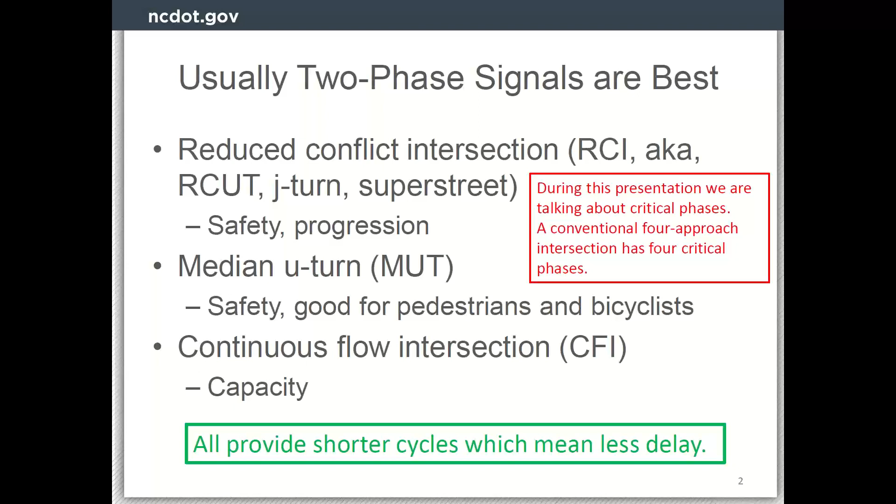Based on previous studies, we know that 2-phase intersection signals perform very well. For example, reduced conflict intersections (RCIs), also known as RCUTs, J-turns, and superstreets, are performing very well. We got very satisfying performance. In North Carolina, we have more than 100 of them, and both in terms of safety and traffic operation, specifically in terms of progression, we got very satisfying results. Also, median U-turns, which are very popular in Michigan, are another example, and continuous flow intersections (CFIs) offer the highest capacity among all intersection designs.

Of course, sometimes it's going to be a big challenge for us to use this kind of two-phase intersection. What's the reason for that? Because it's going to be a big change, and sometimes neighbors, business owners, politicians, and media are not satisfied with that. Removing 2 out of 4 phases, that's a big change. Especially in cases when we are dealing with high demand on minor streets, that's going to be a bigger challenge—there's going to be significant cost and significant impacts that maybe are not going to be the best options for us.

So in this situation, please go to the next slide.

So in this situation, maybe we can provide a better situation by considering three-phase design. Instead of removing 2 of these phases, we can remove just 1 of them, and get results similar to two-phase results, some benefits we can expect from two-phase intersection design, but just by removing 1 of them.

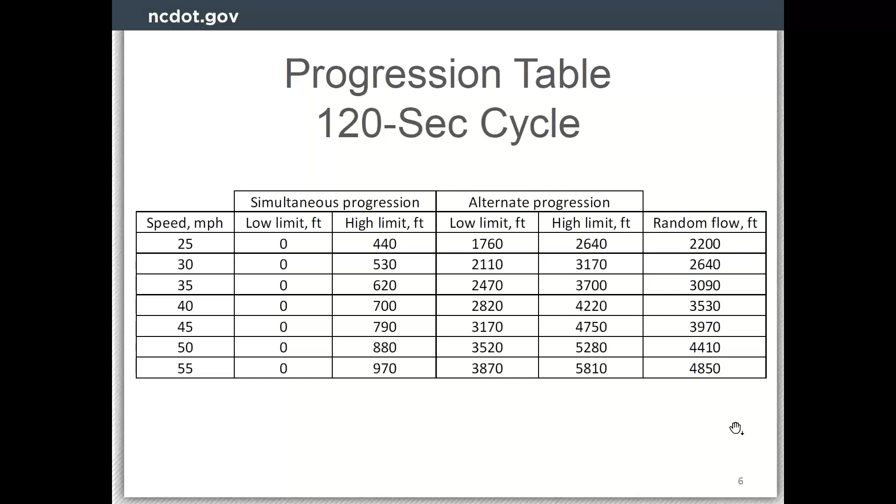In this presentation, we're going to run through quickly some of the three-phase designs that are out there for four-approach intersections, with some pluses and minuses of each design. Always with my work and Amir's work, what we're trying to do is inspire you to kick the tires a little bit. Next time a file lands on your desk and you get a chance to try some intersection alternatives, maybe you'll think of these as well. Give them a try—maybe they'll work out. If you end up going back to a conventional four-phase, fantastic, but at least give a try to some of these. A few notes before we get into the designs themselves.

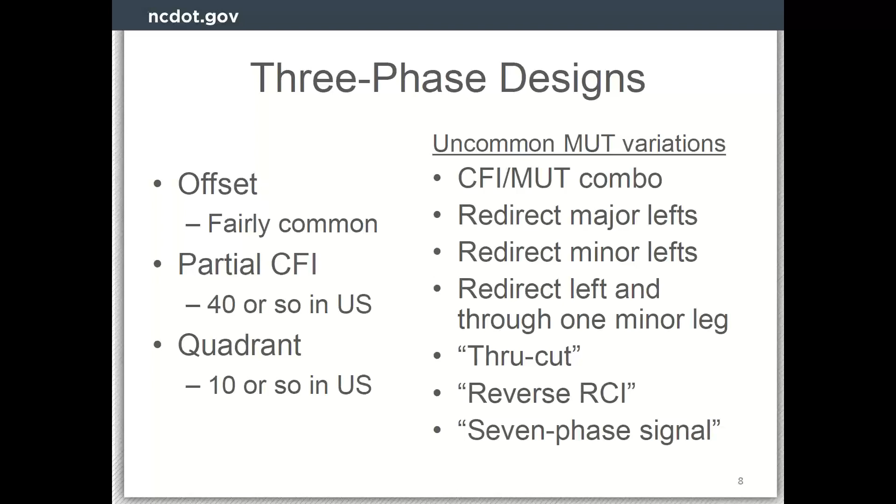Here's a list of the 10 designs we'll show you during this presentation. The 3 on the left side are fairly common across the U.S.: offset intersections, partial CFIs, and quadrant designs. The list on the right side are the uncommon ones that have maybe been built a few places or have just been published but not built yet. We did not include the New Jersey jug handle in our list. In North Carolina, anyway, we do not consider this a competitive design—it takes up more right-of-way than a partial CFI and only delivers a fraction of the capacity and lane savings.

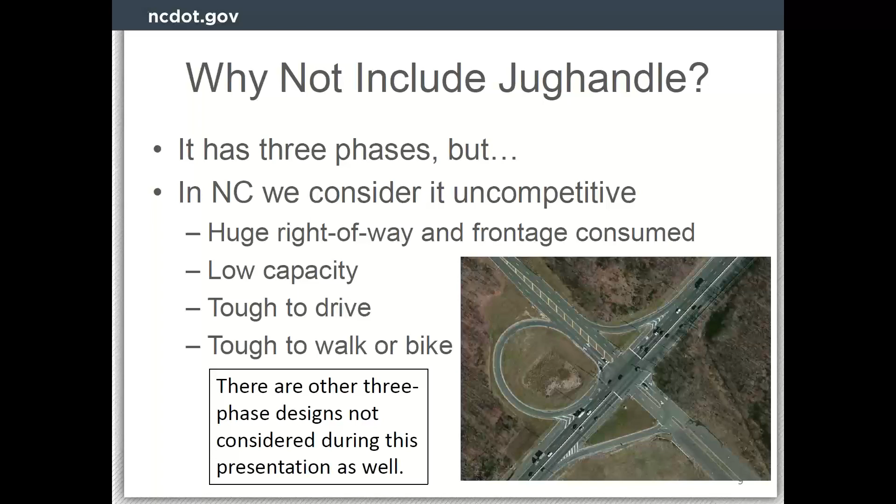So if you're in New Jersey, sorry about that, but that's where we drew the line.

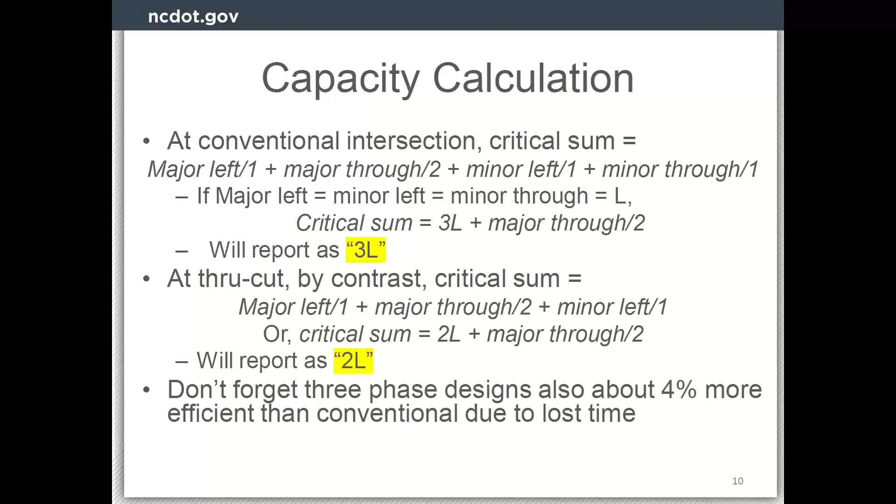Here's a note about the capacity numbers we'll show later. A bit of nomenclature: these are critical lane analyses, vehicles per hour per lane, meeting in the middle of the intersection. We assume the major street left volume equals the minor street left volume equals the minor street through volume, a variable we call L. Running out the critical lane volume at a conventional intersection gives 3L plus the major street through traffic divided by 2 lanes. The major street through term is the same in every solution, so we drop it out and just report capacity based on how many L's appear in the critical lane volume. Lower is better for capacity. That's our nomenclature.

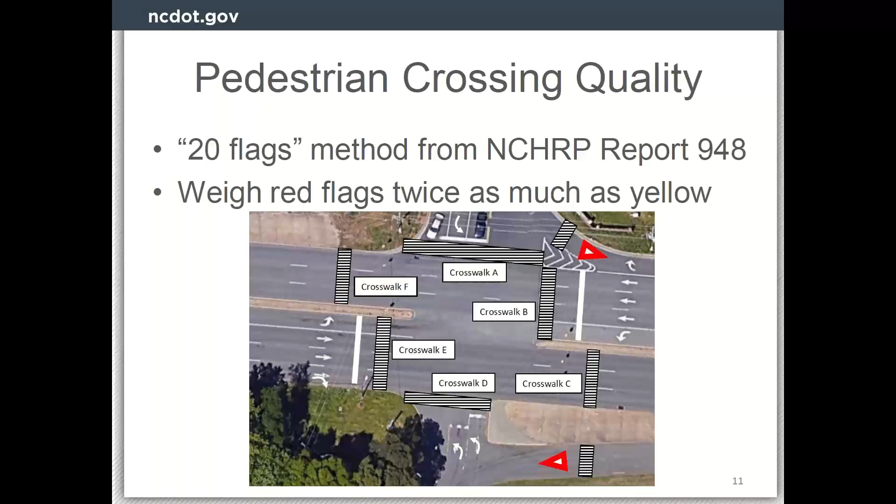One more note on our method. For pedestrian crossings, we rated each design based on the number of flags it achieved using NCHRP Report 948, the so-called flags method. Yellow flags indicate inconvenience, and a red flag indicates a safety concern. We looked at the total number of flags as a pedestrian would try to cross each of the four crosswalks at an intersection. We really like the NCHRP 948 method and recommend it to anyone interested in pedestrian and bicycle crossing quality at any intersection.

Okay, on to the results. Here's a conventional four-approach intersection, setting the table. And what you can see there is some... oops, I think I just did something.

You lost my screen, didn't you? I lost my screen anyway. Show screen. Can you see it in the back? Joe, can you see the screen? Okay, yeah. Oh great, there it is. Okay, I got it back.

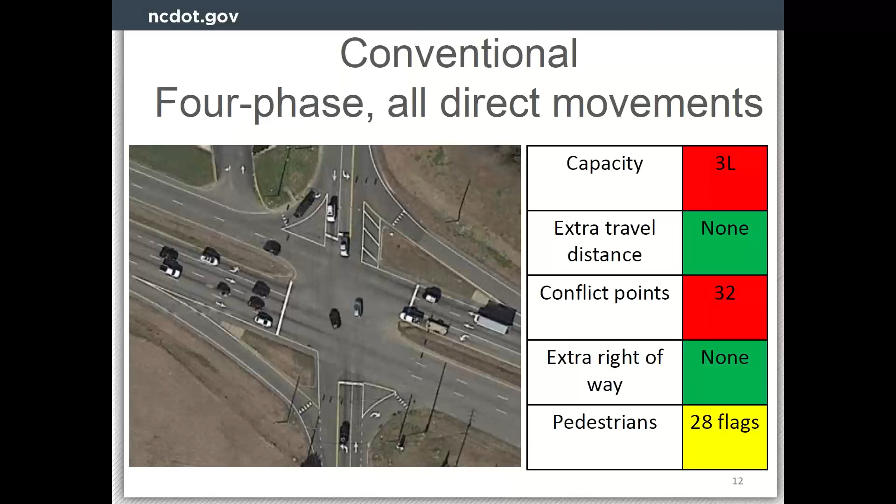So what you see here is the conventional intersection. It's a mixed bag, right? Capacity is low, colored red, but vehicles don't travel any extra distance. There's no extra right-of-way to obtain, and pedestrians are sort of blah in the middle, colored yellow there. So a mixed bag for conventional. Notably, though, capacity does not work very well.

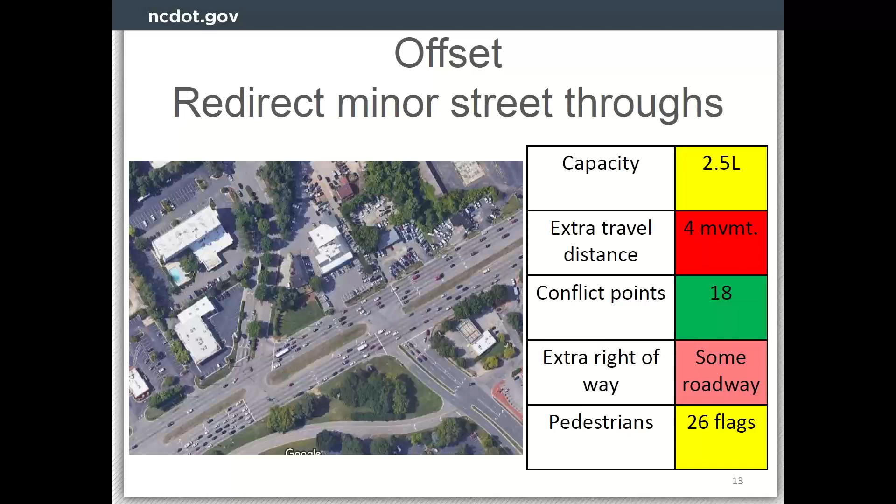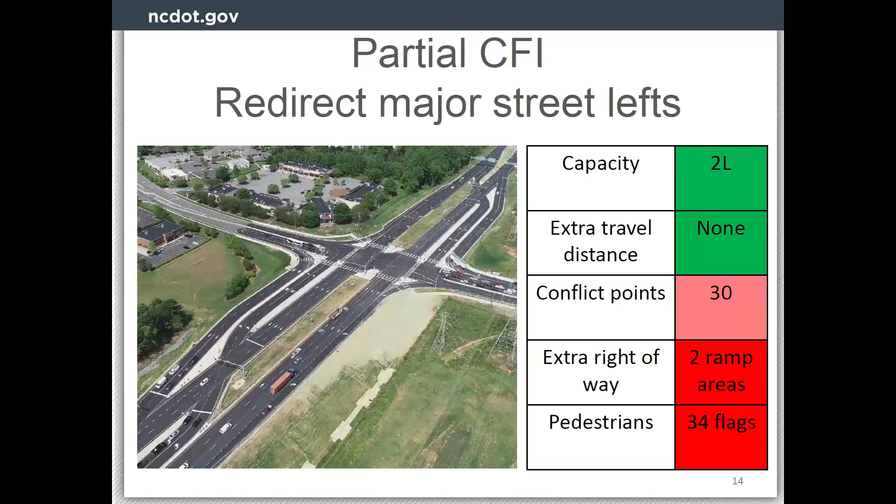Finally, among the more common three-phase designs, the quadrant roadway intersection has terrific capacity, again as low as it gets, but lots of extra travel distance, conflict points not good, and lots of extra right-of-way for that connector road. But pedestrians got good again. So this is the pattern.

This is what we're really presenting here today: these trade-offs. There is no perfect design. Some of these three-phase designs are better in some aspects than others. But here's where we hope, for your particular project with your particular concerns, you can work that trade-off and pick the best design that's out there.

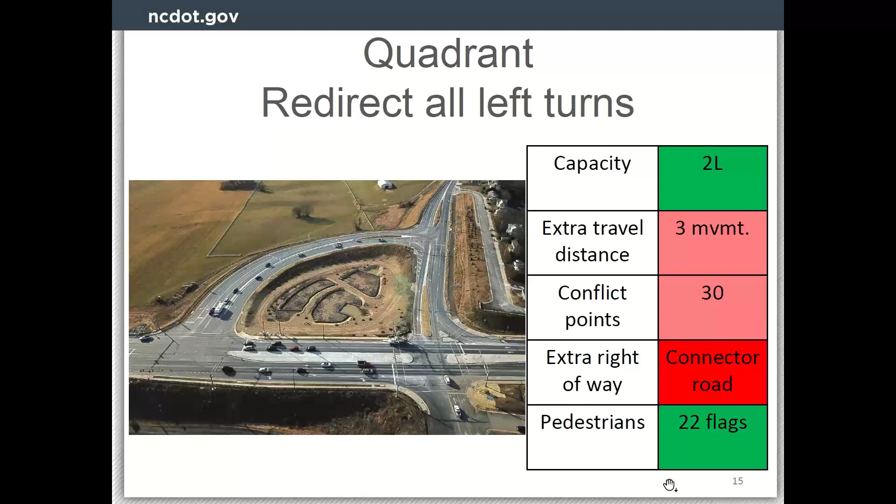Now to some of the less common ones. This is a CFI MUT, a median U-turn combination, that we're actually going to build a couple of in North Carolina in the next few years. Great capacity, travel distance pretty good, only asking one movement to travel extra distance. Conflict points and right-of-way not so good, but it treats pedestrians pretty well. So really 3 out of 5 aspects working well for the CFI median U-turn combination.

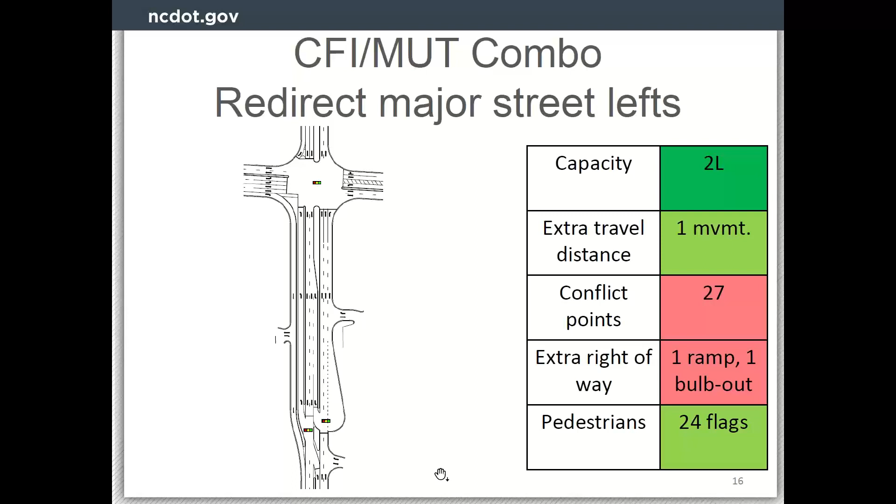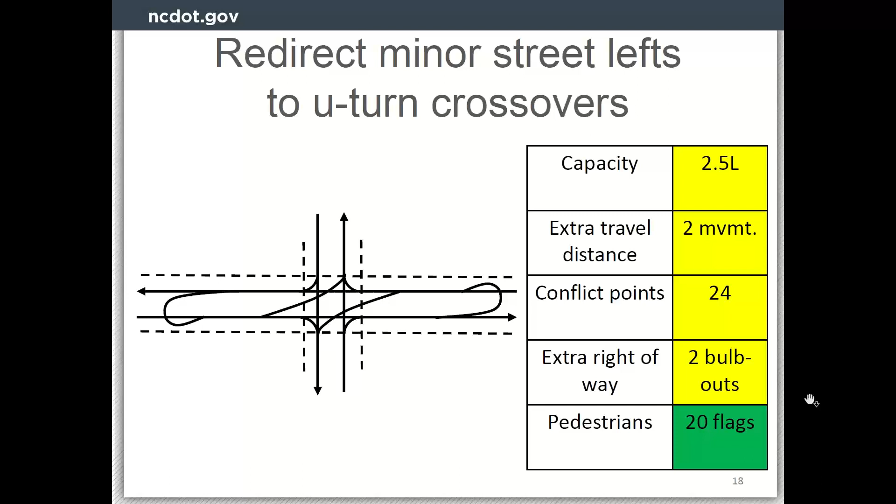Here's a design that's sort of the flip side of the partial median U-turn, redirecting the minor street lefts and leaving the major street lefts to be direct. Not so good on capacity here, middling on the other measures, but really good on pedestrians. I guess you'd say, why would you ever do that one when for the same cost, the same impact, you could have the partial median U-turn instead.

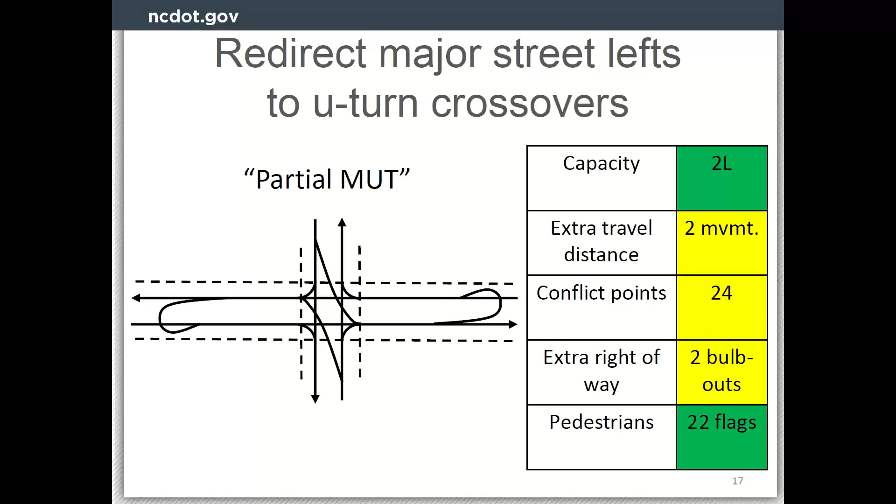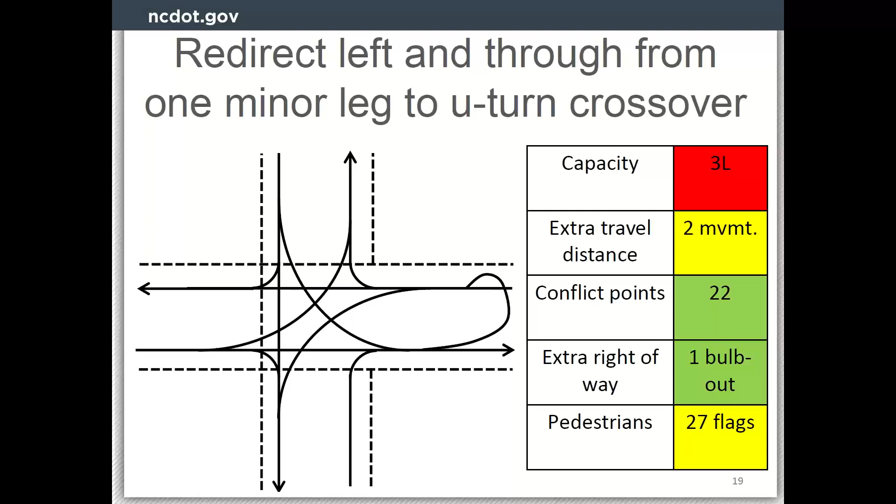Here is a design that redirects basically one of the side streets. So in this diagram, that's the northbound movement. Everybody gets to turn right, just like they're at an RCI. So low capacity, not great, but a couple of green shaded impacts, a couple of yellow ones there. So yeah, okay.

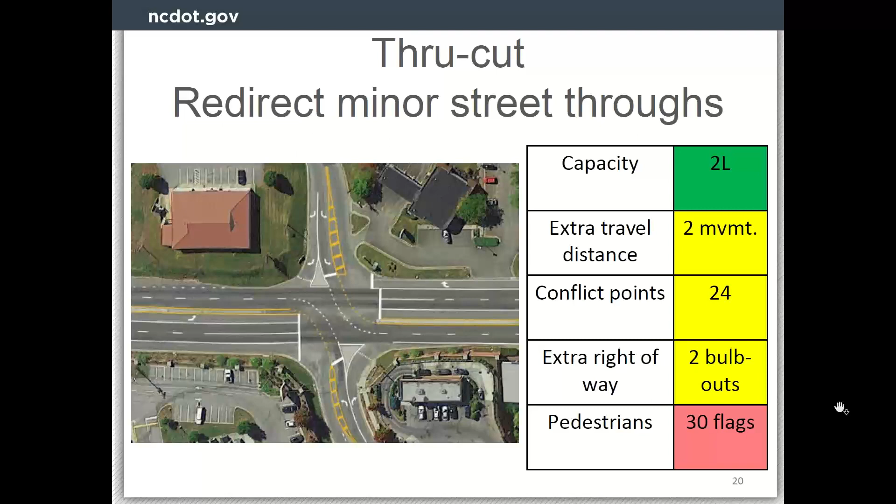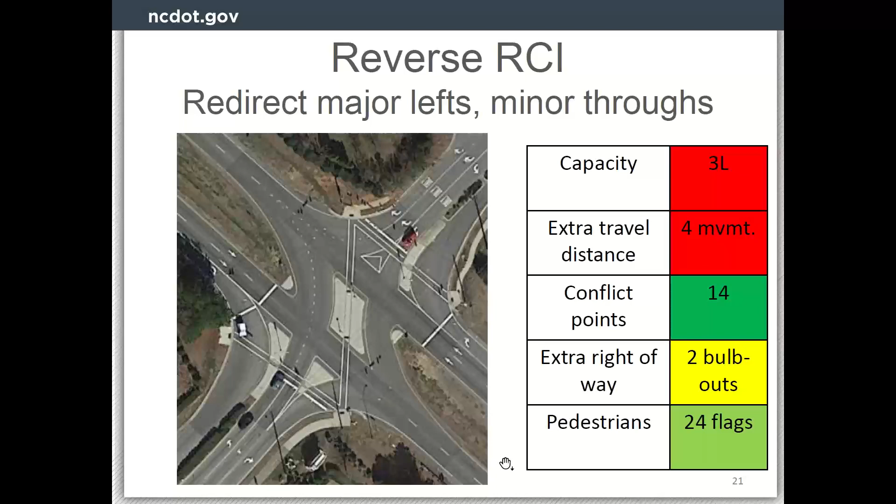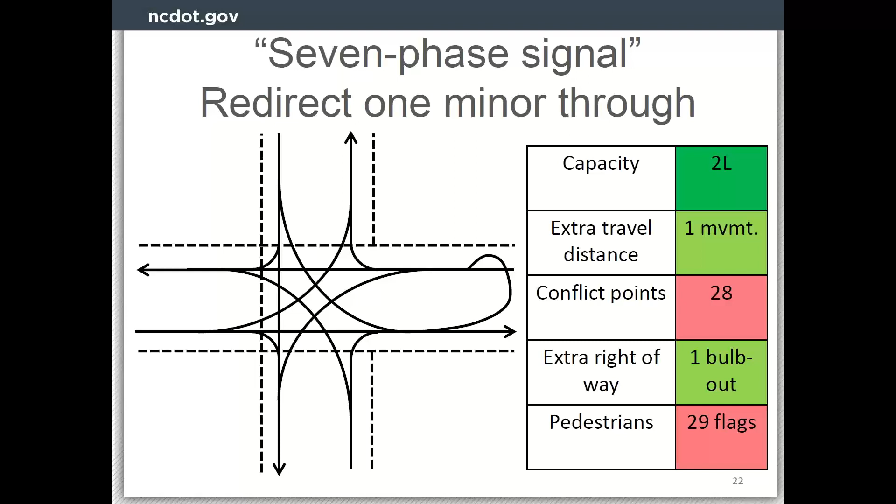7-phase signal. I think this is the last one we got to present. We published this a couple of years ago in ITE Journal in 2019. And again, you can see a mixed bag there. Travel distance and extra right-of-way scoring particularly well, but not so much on conflicts, and pretty rough on pedestrian crossing there too. So overall, what we tried to do here is to show the trade-offs between these 3-phase designs.

I guess our results were a little bit disappointing to me in the sense that I was hoping for a clear winner. I wanted one that stuck out and said that this one looks generally like it'll always work or usually work at most places, but we didn't get that. We got a lot of trade-offs. We can't have it all, but if you're in the intersection design business, you knew that already. That's the life we live. We're constantly making trade-offs. We're making compromises.

It's an imperfect world. The best intersections, as far as we could tell, are the 2-phase designs: RCIs, full CFIs, median U-turns. But if you can't do those, if you must compromise, then maybe you can work in a 3-phase design to still get that progression benefit like we talked about and get some of the better impacts like we saw down the list of the designs.

At least 10 viable alternatives, and there's probably more hiding out there. And again, what our results really showed is a trade-off between the various impacts. Mostly you get higher capacity than conventional intersections, but then after that you end up trading off right-of-way versus pedestrian, etc.

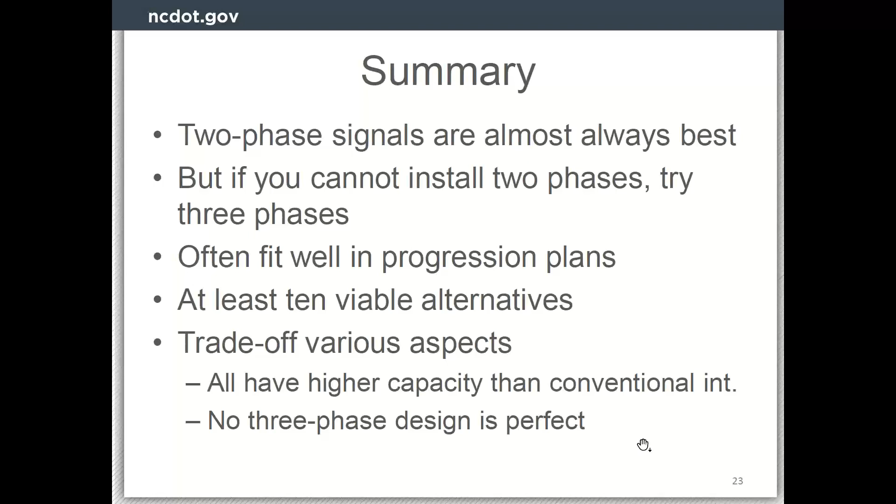I think there's no substitute here for further research. I think hopefully you agree that we've shown enough promise with these designs that we can do more, and there is promise here. So let's get some in the ground. Let's get some built. Let's test them. Let's refine them. Let's start to standardize, and let's see if they really work like we think they will, and start to fill in the gaps with some empirical data.

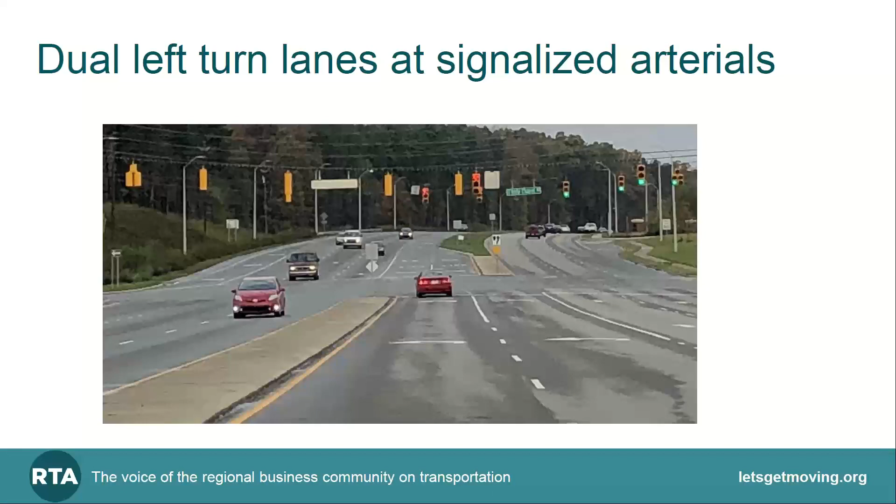Getting into more of the technical perspective, this presentation focuses on dual left turn lanes at signalized intersections. As Kristina mentioned, there's the opportunity for a permitted phase at certain locations. When we talk about permitted, there are obvious benefits, but frankly protected is the normal case, and you've seen that typical condition. There are a lot of benefits of protected left turns, so let's be clear about that.

No conflicts with opposing traffic when executing the left turn. Another benefit is providing clear direction to the motorist - the arrow provides a clear indication of what protected or exclusive use is available to them. It can also be more efficient because vehicles will platoon together as they wait for that phase to come around in the cycle. So a number of benefits - those are probably the more obvious ones.

But we're looking for a permitted phase opportunity, so we want to talk about some of the impacts of when you have protected-only left turns specifically. A lot of those are operational. One would be it requires a dedicated phase for even a single left turning vehicle.

Without any permitted phase available, you have to display the dual arrows for that, and while you're doing that, everybody else has to wait. Dr. Hummer and Amir both talked about some of the benefits of reducing the number of phases for efficiency, and this applies broadly.

As a result, delays and travel times will increase, in some cases at the margin by several minutes for some users - that's if you've just missed the arrow phase or that protected exclusive phase, you'll have to wait the whole way around the cycle again. If there were a permitted phase, you would not. Those vehicles have the largest delays; the average delays aren't as much, but there are still obviously more delays, and it's intuitive that cycle lengths go up.

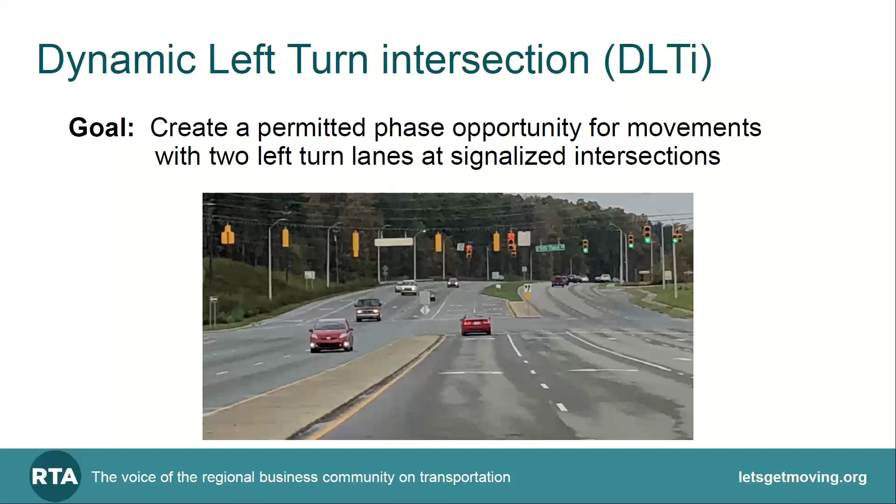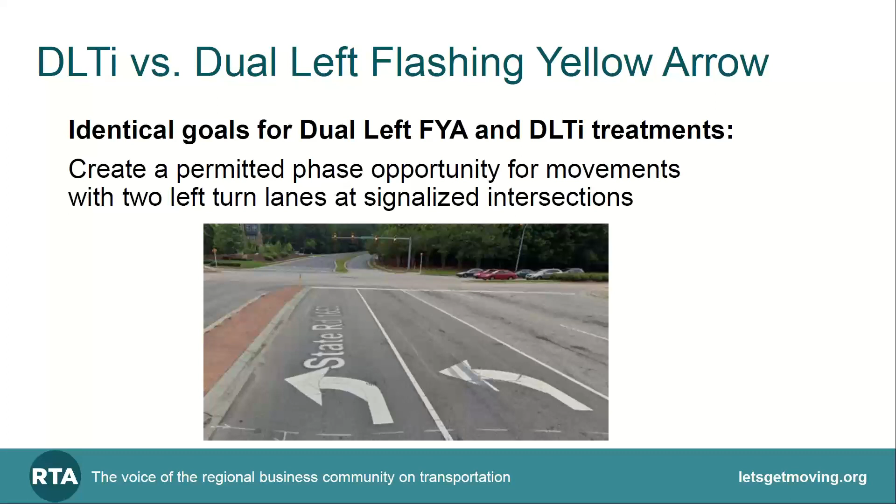The dynamic left turn, a phrase coined by NCDOT, aims to create a permitted phase opportunity for movements with two left turn lanes at signalized intersections. You might say there are other ways of doing that, such as simply flashing the arrow for both lanes, and that's right. Dual left flashing yellow arrow and dynamic left turn, the new one we're introducing today, have really the identical goal: to create a permitted phase opportunity for vehicles to go without the exclusive arrow at times during the cycle.

So what is the DLTI, the dynamic left turn? From the implementation standpoint, you close the rightmost or outer left turn lane during periods when the permitted flashing yellow arrow is active. In this case, the rightmost left turn lane is not available for use, while the leftmost left turn lane is available, and the flashing arrow would be available there. There will still be a protected phase, or at least there could be, but operationally it's not required.

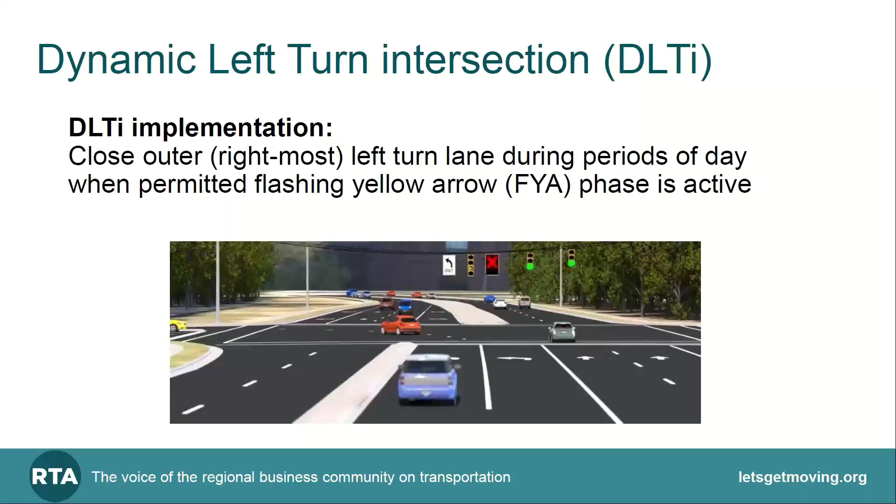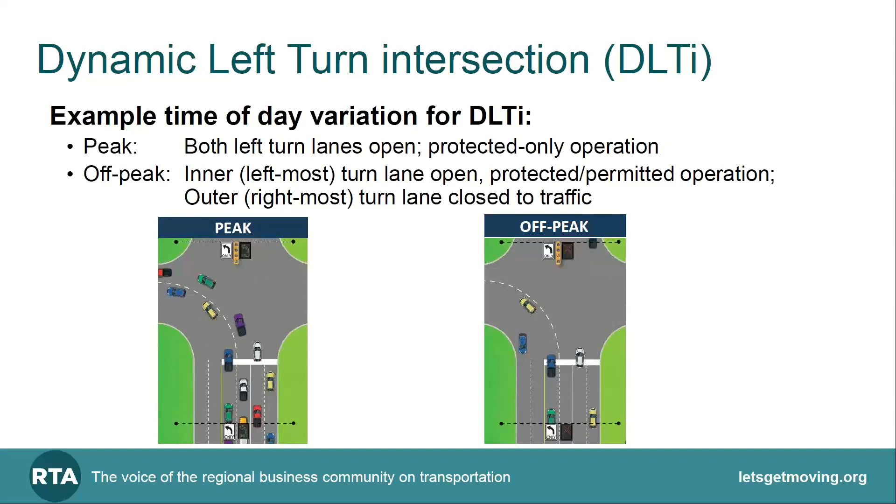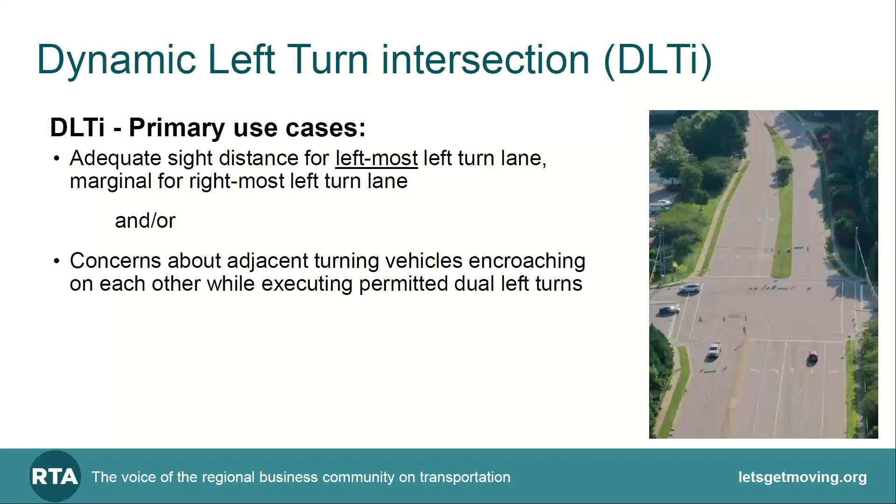So what are the use cases? When would you consider a dynamic left turn where you're closing one lane during off-peak periods? Our sense is there are really two. One is when you have adequate sight distance for the leftmost left turn lane, but the rightmost left turn lane is marginal. Another would be if you have concerns about adjacent turning vehicles encroaching on each other while executing permitted dual left turns, for whatever reason, from a policy standpoint, site-specific concerns, or some concerns about swept path issues. Either one of those would be a use case where you might consider this. But again, the dynamic left turn isn't appropriate everywhere, just like a dual left flashing yellow arrow isn't appropriate everywhere.

Let's do a little comparison. Dual left, which we've seen in a few places in North Carolina and elsewhere, has both left turn lanes available, either under protected only or protected permitted. The use case for that is more of an 'and' gate: you have to have adequate sight distance for both left turn lanes, and no significant concerns about swept path issues or adjacent turning vehicles encroaching on each other. In terms of operational comparison, during the peak period there's really no difference between either one: both left turn lanes are open, protected only, whether it's dual left or dynamic. During off-peak for dual left, both left turn lanes are open, protected permitted.

For the dynamic, or DLTI, during off-peak only one lane is open. That's the difference. The dynamic involves both the time of day and the number of lanes.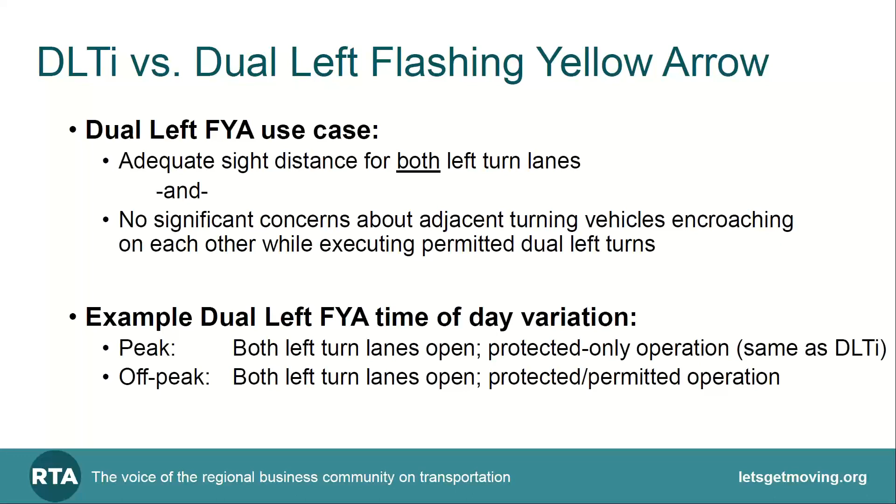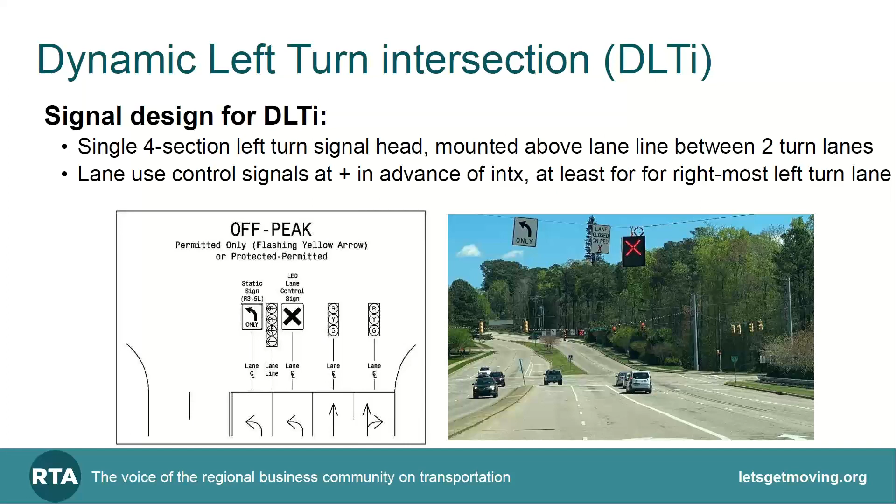You also have lane use control signals at and in advance of the intersection, at least for the rightmost left turn lane. You can make an argument to put them over both, even though the left one is unchanging. For the initial pilot, as you can see there, that is not the way it was done. It was just initially just that rightmost left turn lane, because that's the one lane that does change there.

Here's a graphic. Again, you can see the DOT put this together, and they did a very nice job with it. You see both left turn lanes, the 4-section head, the green arrow indicating the protected case. In this case, it would be protected only for the peak periods. For the off period, it would be the X up, showing the rightmost left turn lane closed and the flashing arrow.

You could probably realize at this point there's nothing technically new here. These are standard devices being applied—it's the combination of this application that's new. It's more that approach or that combination. But there's nothing here that is new, and this is actually not an experimental design.

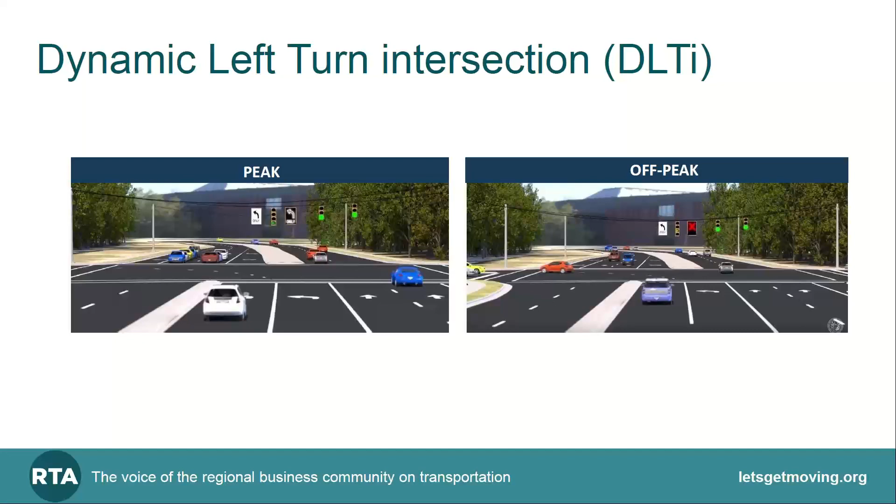So this has been piloted. NCDOT created some site selection criteria to try to select a location. They wanted some volume out there, sufficient to justify having 2 left turn lanes, at least during peak, but enough variation during the day for left turning volume, so you would have opportunities to just have 1 left turn lane open.

Adequate sight distance, in this case, for both left turn lanes. The reason is, while even marginal sight distance would be okay for that rightmost lane under long-term application, for the initial pilot, to make sure that this was working, they wanted to feel comfortable about the sight distance. And obviously receptive partners, which you need for any pilot at any time.

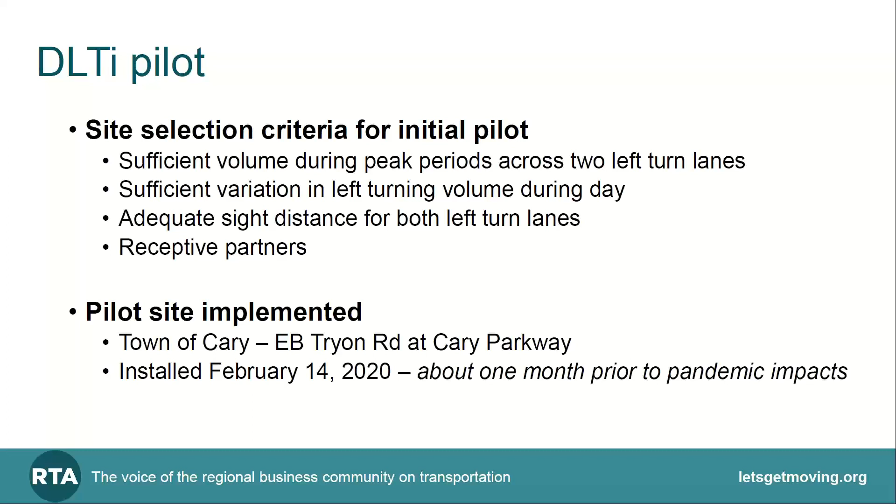The initial pilot was implemented in Cary, just outside of Raleigh, in Wake County, North Carolina, at the corner of Tryon Road and Cary Parkway. It's been installed for well over a year now, installed a little bit before the pandemic.

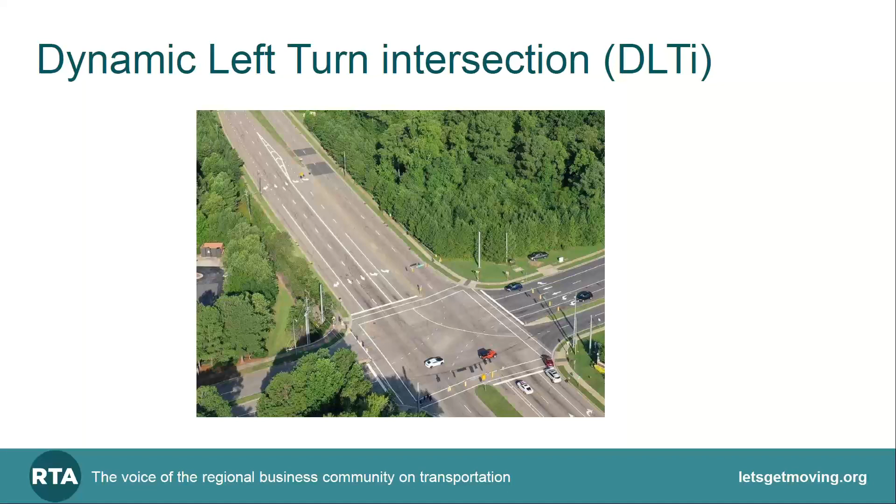Here's the location. Standard 2 left turn lanes there, you can see it. You can also see the cross-hatching, which is designed to guide traffic to the primary, or leftmost, or positive offset—pick your favorite—guide them into that lane. I try to do that. There's another view on the back side. You can still see that same striping pattern, and a line to help separate traffic through the intersection and also to guide traffic.

So how's it done? Pretty well. It's been open in the town for more than a year, as I've mentioned. The operational framework has varied as the pandemic and travel have evolved. For several months, there really wasn't much dynamic happening—it operated as a purely positive offset left turn, where the rightmost left turn lane is closed, because there wasn't a need to have the peak periods open. But then the PM peak returned, and then the AM peak returned.

Some drivers are saving up to 2 minutes of travel time each cycle. VHB did an estimate of travel time savings, and using the typical assumed value of time, it actually paid for itself within 6 months. So though we've not asked them to do it again, I would suspect it's paid for itself twice now at this point, based on that assumed value.

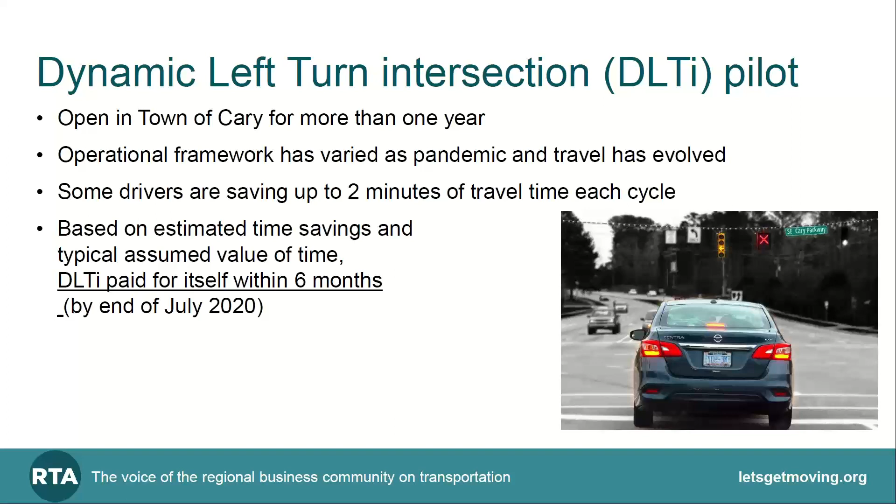Compliance is a good question. It just turns out at this particular pilot site, there's a shopping center just beyond the intersection for folks making that left and then turning into the right. So a little more than half the people prior to the pilot were actually in that rightmost left turn lane to try to line themselves up, at least at the margin. Some folks doing that—well, it's worked pretty good.

85% are actually using the leftmost left turn lane, so we're getting better compliance. It is not 100% because it's still an unfamiliar piece, but as Dr. Amir and I both noted, it's a change from 65 to 15% usage of that rightmost left turn lane, which is good.

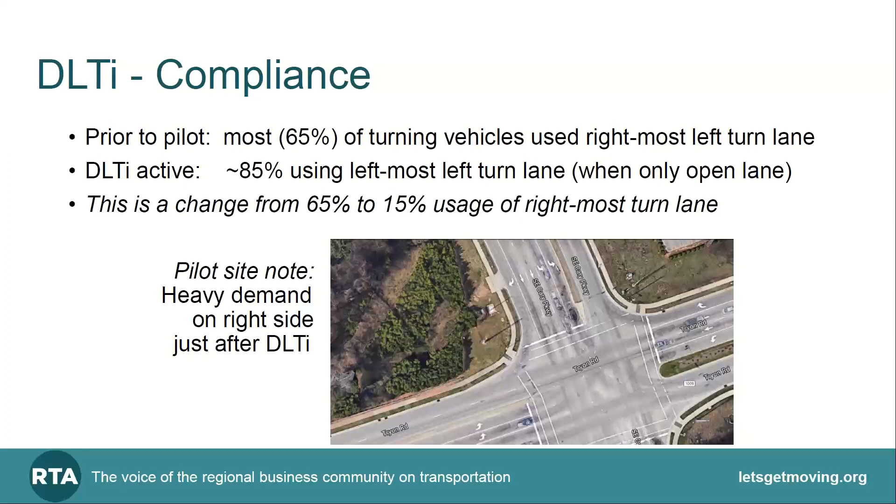Very limited citations through the first months of the pilot. I think that has largely been the case going forward up to this point.

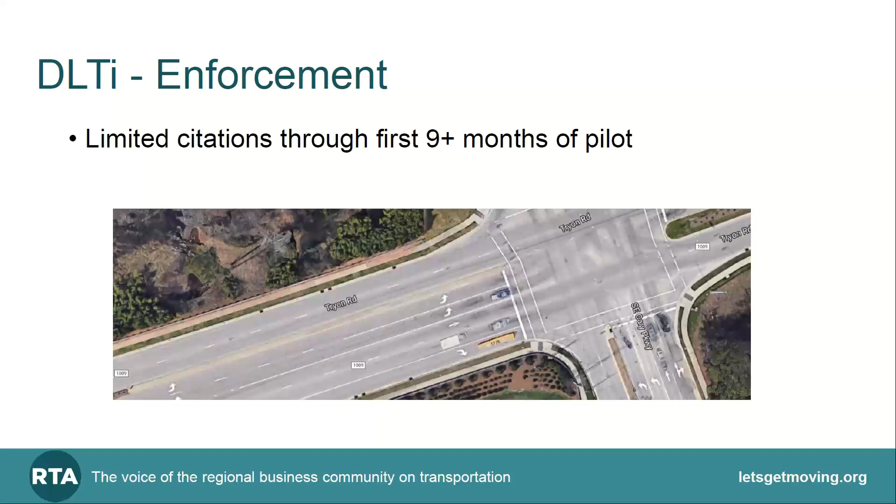Definitely some lessons learned. You've got to clearly convey the expected benefit for the public because this is new. There was some question, it still comes up, well, why don't you just have both left turn lanes open? You've got to try to describe what the use case is and why you're doing what you're doing. And the gist of it is in one sentence, so we can allow the flashing yellow arrow to appear. So you have to explain that.

You have to add, we don't have to, but in this case, a sign was added to explain what the X is. You can see that there. It may be possible in the future to have the leftmost left turn lane not be a static sign, but also a lane use control, which might provide some contrast, and that sign may not be needed. We'll see on future installations.

A little bit of striping was added in the intersection for guidance, and you do have to monitor some concerns about being trapped in the left turn lane for folks who are unfamiliar and who at other times of the day were used to using both left turn lanes and all of a sudden they can't. And so that's the nature of any pilot or anything new, but it's a legitimate concern.

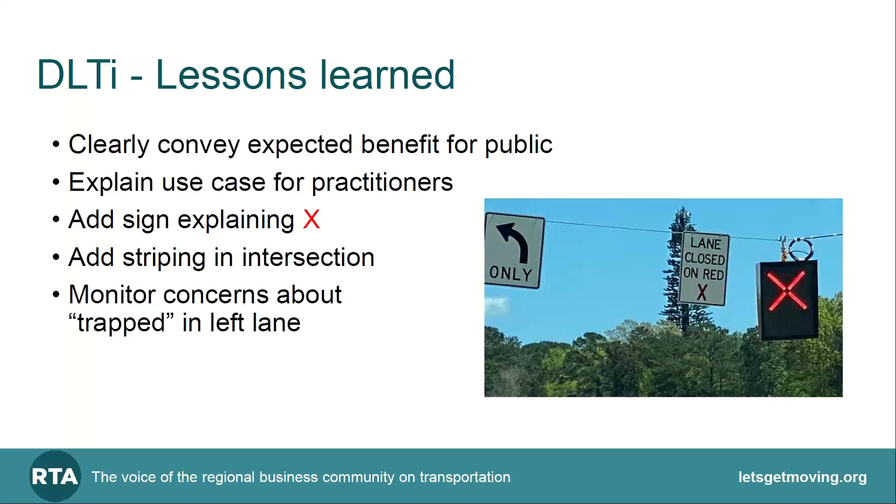In terms of costs, not expensive overall. Dynamic left turn, 20 to 35,000, including that span wire in advance, lane control signals. Of course, the dual flashing yellow arrow is even lower and does not require that. So again, being very clear, if your dual flashing yellow arrow works, that's what you should use. You shouldn't use this dynamic left turn if the use case works for that, because this is a little more expensive. But either would typically make a competitive submittal for DOT for some of the new opportunities for funding projects in terms of spot mobility, what's called there in North Carolina.

Where would you not do this? 3 or more opposing through lanes, probably not. If you have inadequate sight distance all day for 1 or more of the left turn lanes, probably not. Same thing. So what's the current status?

The department does consider this site a successful pilot. We're excited about that. We've held that final comparative analysis in abeyance, so to speak, due to the pandemic as it was installed just before that, and traffic volumes have yet to return to those numbers, at least in Cary. The department is sharing information with ITE and RTA. We're sharing with you all right now, other states. It is eligible for implementation at locations in North Carolina. So we're happy about that. Again, that's a final look-see at that.

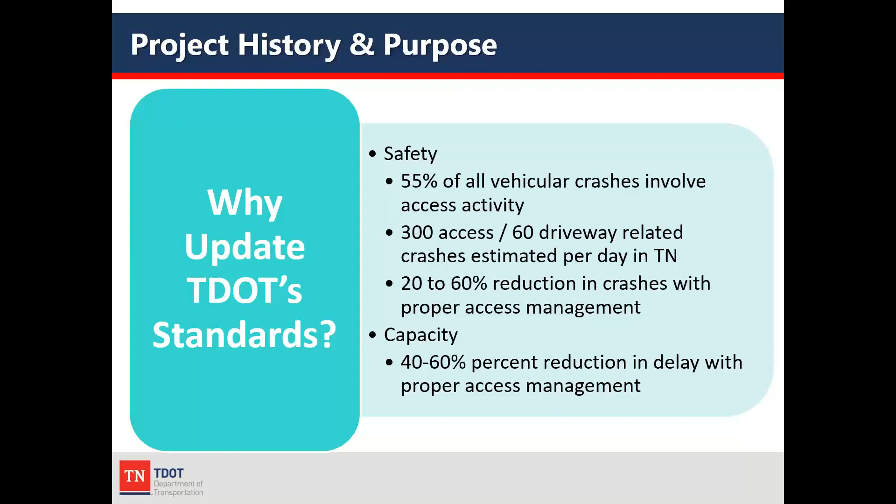As far as capacity, plenty of studies out there show a 40 to 60% reduction in delay with good access management.

As you know, we're all pretty familiar with the transportation and land use cycle. You can start anywhere on the cycle, but let's say we start with arterial improvements, where TDOT comes through and improves an arterial. That increases accessibility to the area, which increases land availability, generally leading to increased land value and land use change. As the land is developed and traffic increases, level of service goes down, and then there's calls to improve the highway again. So the goal with improved access management standards was to slow down that cycle without slowing down any economic activity.

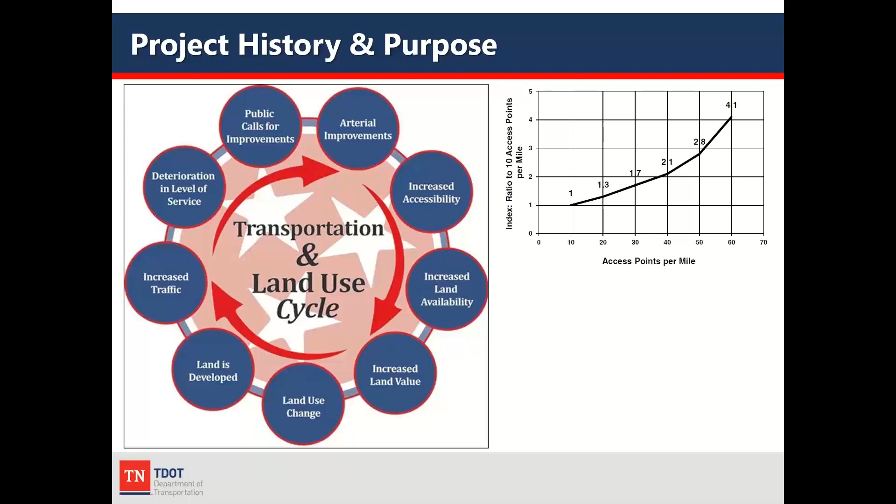The chart that just came on screen is really one of my favorites for explaining good access management. This takes a baseline from TRB, which studied hundreds of corridors. If you take 10 access points per mile as your baseline, by the time you get to 20 access points per mile you've got about a 30% increase in crashes. And by the time you get to 40 access points per mile, you've doubled the number of crashes along the corridor. So there's a very clear link between access points per mile and crashes.

We worked closely with the multimodal division here, and in fact Gresham Smith had previously worked on TDOT's multimodal design guidance. So we were very cognizant that you don't always want those 40 mile an hour progression speeds, but certainly in some land use areas you do, in rural and less dense areas. We did take into account multimodal concerns as we developed the updated access management standards, and I'll touch on that here in a little bit.

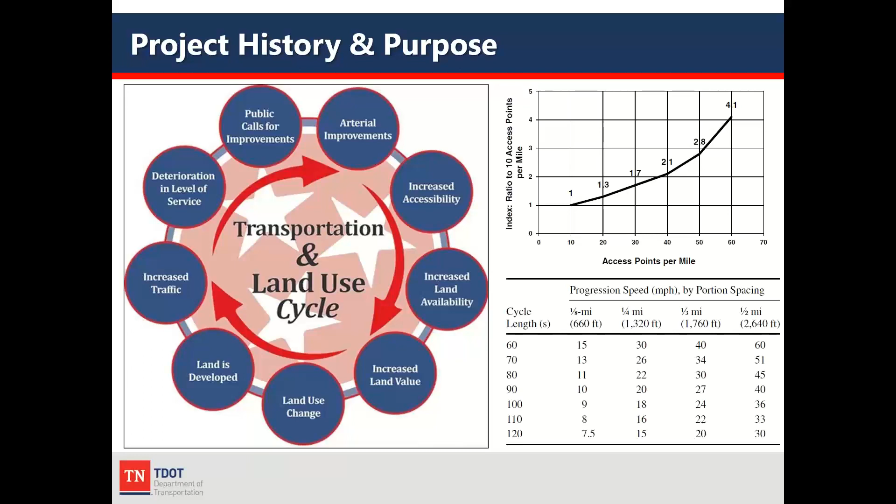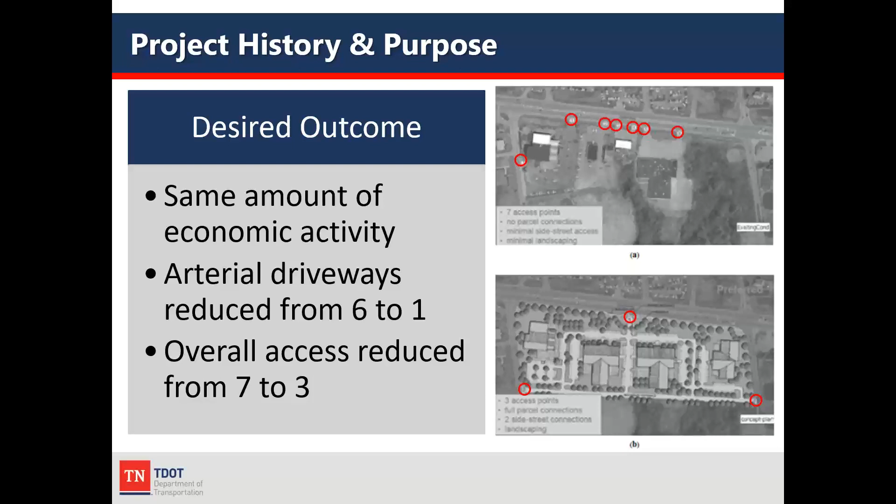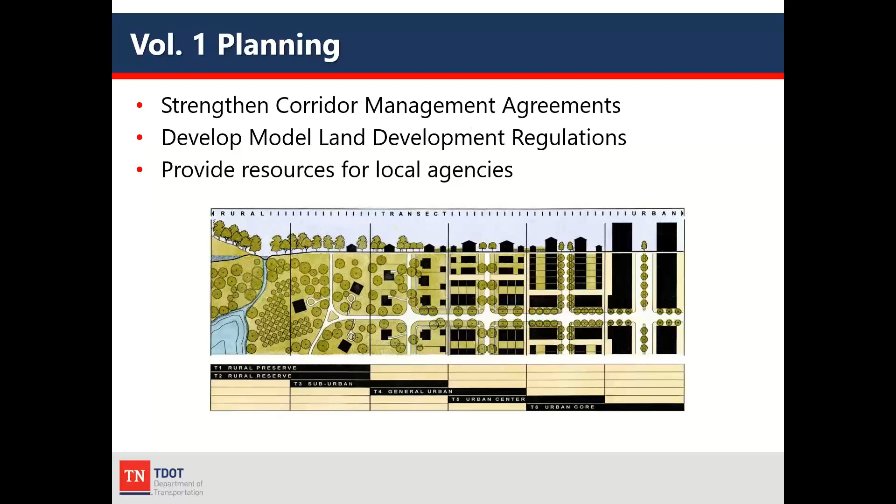All right, so moving on from the why TDOT decided to take this on, is Volume 1, planning. The planning volume provides guidance on how to develop corridor management agreements. It also has some model land development regulations, and it's different than the other two volumes in that it's not guidance as much as it is a resource. It's for local agencies to use to help them with their land development regulations and to develop corridor management agreements should they choose to do so.

For those that aren't familiar with what a corridor management agreement is, it's a collaborative agreement among multiple jurisdictions or agencies that addresses the development, management, and operations of a transportation corridor. So it's not just a traffic study. It really takes a holistic view of a corridor that maybe runs through two or three towns or a couple of counties, and works with a team that has buy-in of local officials, both elected and your planning and engineering staff, to come up with a vision for the corridor so that it maintains consistent operational characteristics throughout the corridor.

TDOT's been doing them since 2010, but up until now it had really been sort of ad hoc development, and they realized they really needed some written guidance and a manual on how to develop proper corridor management agreements. So that was about half of Volume 1, the corridor management agreements.

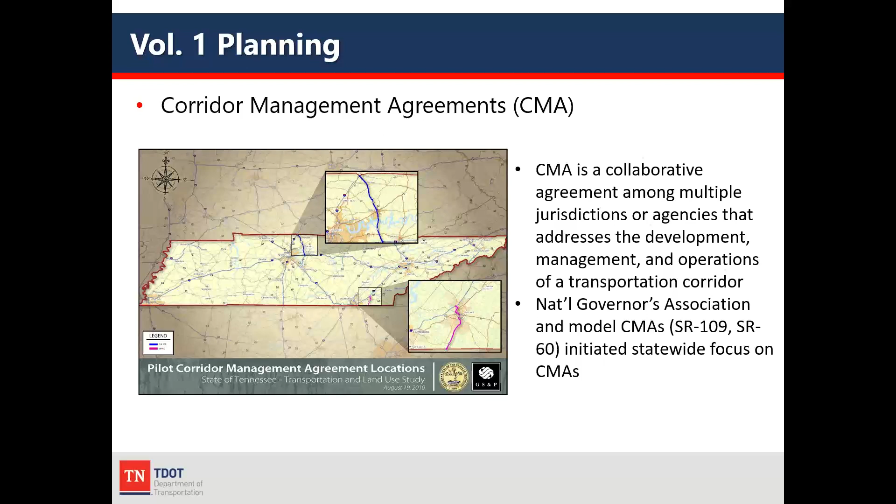The second half is about model land development regulations. TDOT, by law, does not get into land development laws - that's for local governments and agencies in Tennessee. But of course, as all traffic engineers know, you're really fighting with one hand tied behind your back if you can't address land development when you're making traffic decisions. So TDOT wanted to develop these model land development regulations that could be a resource for local officials that wanted to make what we believe is better land development decisions.

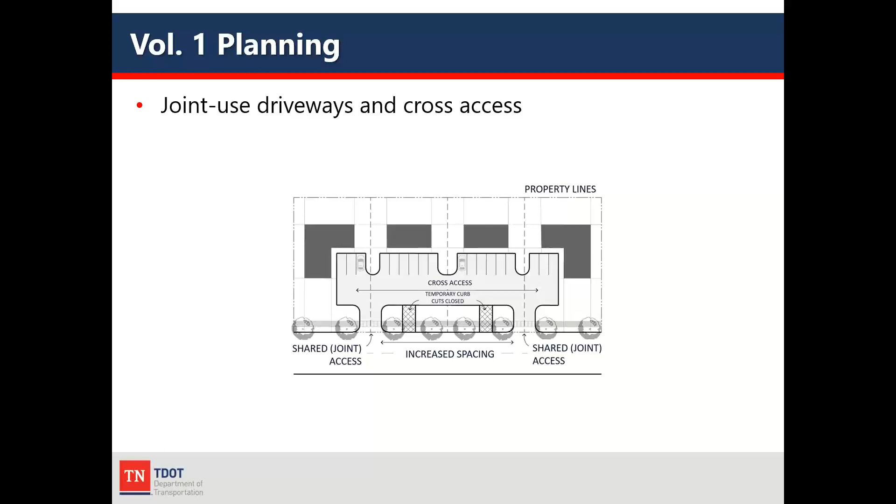So one is joint use driveways and cross access. Instead of every parcel receiving a driveway on the arterial, it's the regulatory framework to get those properties to share access, and also how to phase out existing driveways as their neighboring parcels are developed. That way you can go from four driveways to two, as shown here, with the joint use driveways and cross access for that commercial development.

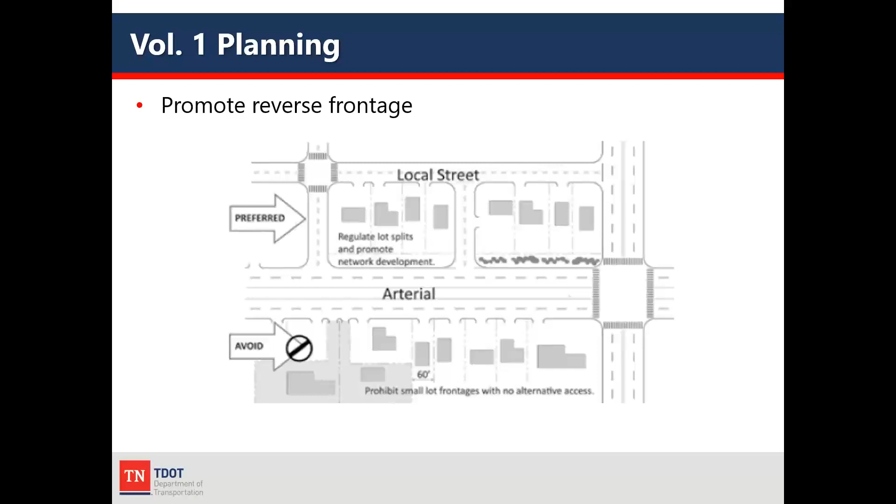There's also some regulation language for promoting reverse frontage, so that developments are being accessed off a collector road behind the developments, instead of every parcel having a driveway on the arterial. There's also model land development regulations for out parcels, a similar deal, so that those out parcels get their access from internal circulation of the development instead of off of the main roadway network.

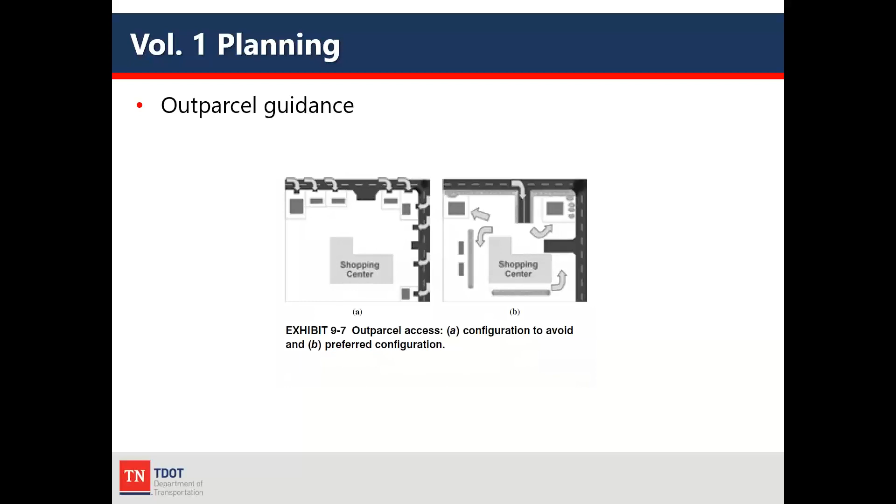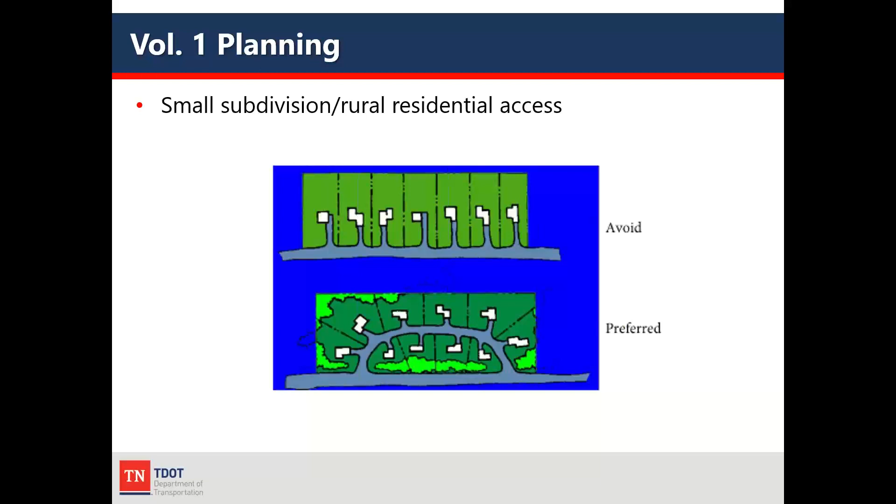And then something we especially see in rural counties is, maybe it's a farm or a large parcel that gets developed into a rural subdivision type development, where you have, say, ten 100-foot wide parcels that go back several hundred feet, and each one gets a driveway because by law they have to have access. But it's about how to help promote more of the development pattern seen in the bottom of the image, where you're really reducing the number of access points on the arterial, but still fitting in the same number of homes.

So that's a very quick review of the Volume 1 planning. Now, Volume 2 is where we discuss intersection and interchange evaluations for TDOT. This is really to help promote more innovative intersection and interchange design options.

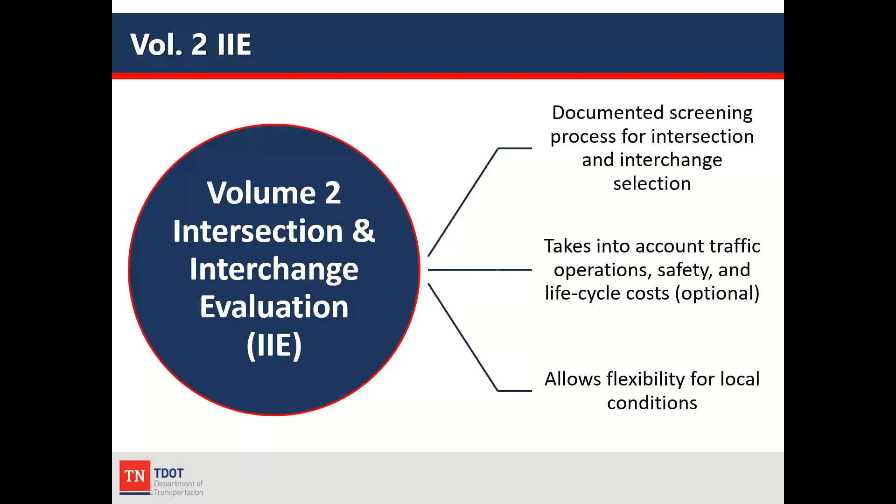So it is a documented screening process for intersection and interchange selection. It takes into account traffic, operation, safety, and life cycle costs, and it allows flexibility for local conditions. As you'll see as we get into this, there was very firm direction given from our working group that TDOT did not want a rigid system where, if something came up number one in the ranking, that was what would have to be constructed at the site. This very much just provides good guidance and framework for good traffic engineering.

So for TDOT, it is branded as intersection and interchange evaluation. For many on the webinar here, you might know it as FHWA's ICE process in policy. It's really the same process that we use, TDOT just wanted a little different naming and branding on it. But this will put TDOT in the front third of states that are really embracing the ICE policies that FHWA has been promoting for a few years now.

A document that was very handy as we developed this was FHWA's Alternative Intersections Interchanges Informational Report. These are a lot of the types of intersections and interchanges that TDOT wants to make sure we're getting considered. Again, it doesn't mean they're getting selected, but at least getting considered and not forgotten about as TDOT goes through their intersection interchange evaluations.

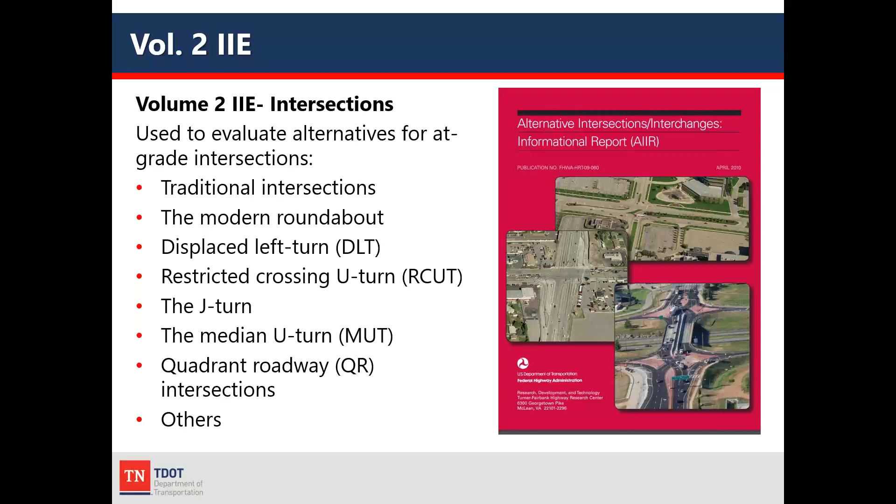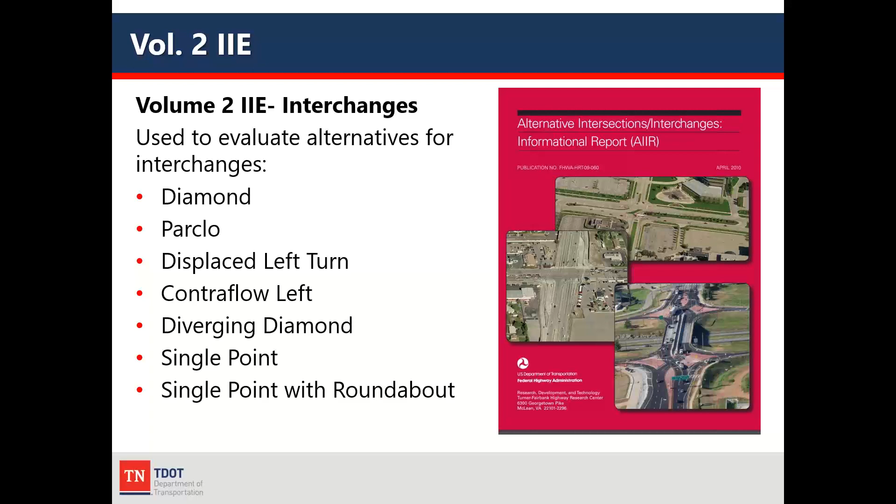And then on interchange controls, again I won't read the list there, but the point was just to make sure that the new innovative intersection or interchange control types are being considered. The guidance really has to do with service interchanges. There's not a lot in here on system-to-system interchanges, but of course those usually aren't a matter of access control because those are two interstates coming together generally, or fully controlled access state routes.

So TDOT's IIE process is implemented in two stages, similar to the FHWA ICE process, where stage 1 is scoping and stage 2 is preferred option selection. Honestly, stage 1 scoping is really what's sort of new to TDOT. Once you get to stage 2, which is preferred option selection, that's really a lot of what TDOT does now.

So the stage 1 scoping is a step to determine the short list of all possible options that merit further consideration and analysis because they meet project needs and are practical to pursue. It's a very quick, almost checklist type of process to very quickly get you to stage 2. And then stage 2 is, of course, the more detailed stage, where you're doing your more traditional preliminary engineering, more detailed traffic analysis, cost estimating, that sort of thing.

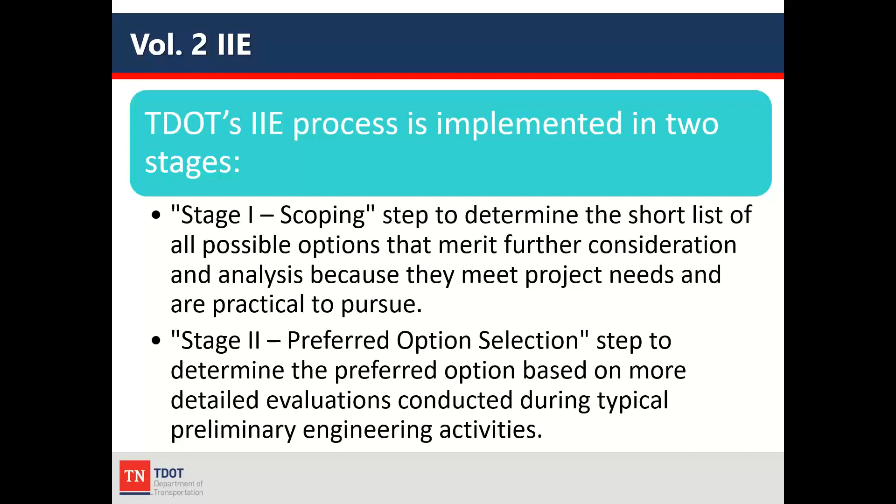As part of the project, we developed several forms that are really sort of the backbone of the intersection and interchange evaluation process. The first form is general traffic engineering data that's needed for the analysis. This is data that TDOT generally already collected for any of their scoping type studies, but it gets it all in one form so that it's all there, which helps higher-level staff quickly see the information as far as the existing traffic and data.

So it's got an area for your existing and predicted and projected AADTs, along with truck percentages and things like that. It's got a qualitative checklist of things for multimodal activity. We didn't want to just have a 'how many pedestrians are out there' question, because if you've got a location now that has no sidewalks, of course you wouldn't have any pedestrians. So it's more questions to get people thinking about what the area will look like in the future, and what conditions are out there where people may want to walk—things like, are there bus stops nearby, is there a retail center nearby, a school, a library—those types of prompts to get people thinking about pedestrian needs.

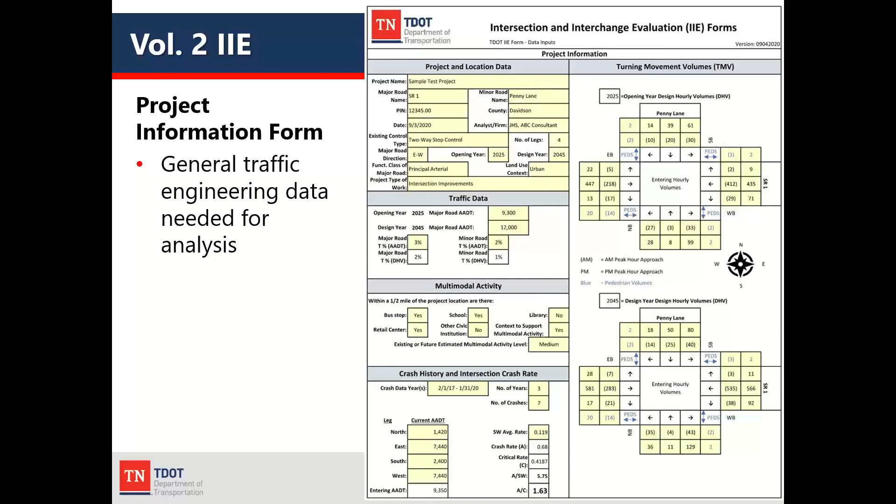From there, you go to the stage 1 scoping form. Again, intended to be a very quick checklist of the different options to be considered.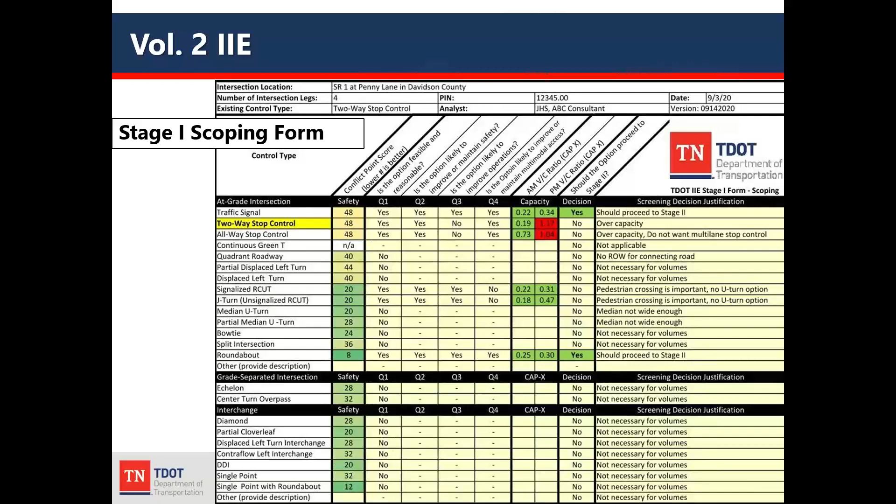I mentioned CapEx helps with that. The manual provides guidance on how to download and use CapEx. For those not familiar, it's a really handy volume-to-capacity ratio spreadsheet tool that FHWA developed, now maintained by the Crash Modification Factors Clearinghouse.

As we were developing the project, we found some states take CapEx as a starting point and develop a state-specific spreadsheet. This is sort of TDOT's beginning into this effort, so they wanted to use as much available resources as possible. It was decided CapEx was a good starting point instead of diving in and developing a custom tool, trying out this first rollout with CapEx. Maybe there'll be modifications in the future to make a TDOT-specific tool, but for now CapEx was selected.

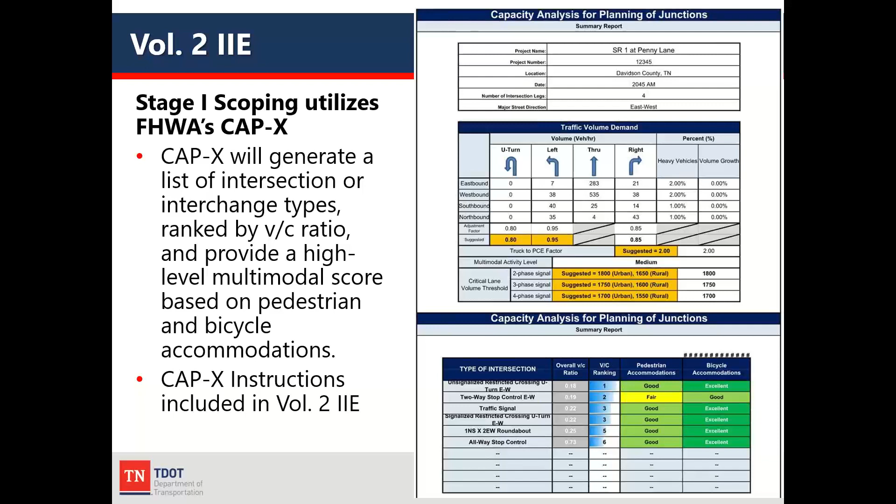Again, this is certainly no replacement for detailed traffic analysis like HCS or Synchro or VISSIM, but it does give a very good tool for checking the volume versus capacity ratio and seeing if something's a reasonable alternative to consider.

So after you've selected your 2 or 3, maybe even up to 4 options to carry into stage 2 selection, this is where you're going to spend some time and effort on analysis—doing more detailed traffic analysis and developing a construction cost estimate. Generally TDOT has their own tools, but any other state would use whatever tool they have to develop their opinion of probable cost.

We do provide optional guidance for doing life cycle cost. It's not required in TDOT's process as of now. They'll try it out maybe on more larger projects and take a look at that. But there is guidance on how to do a life cycle cost analysis as part of this, the IIE.

And then the traffic analysis, which would be very similar to what TDOT currently does in their option selection. We do have optional predictive crash analysis. So we provide guidance in the manual on using FHWA's SPICE tool, but certainly if it's a more detailed study, you could use IHSDM or any of the HSM spreadsheets, as long as the TDOT project manager agrees for doing the predictive crash analysis.

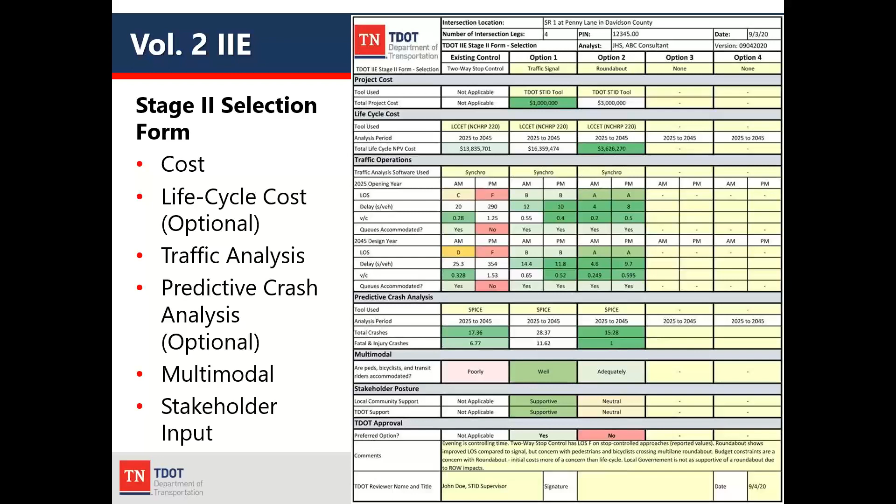So as far as life cycle costs, this is a first implementation of formal life cycle cost for TDOT. TDOT has selected to use the life cycle cost estimate tool. It's from an NCHRP report, a free download. Again, a decision by TDOT to use as many available and already developed resources as possible.

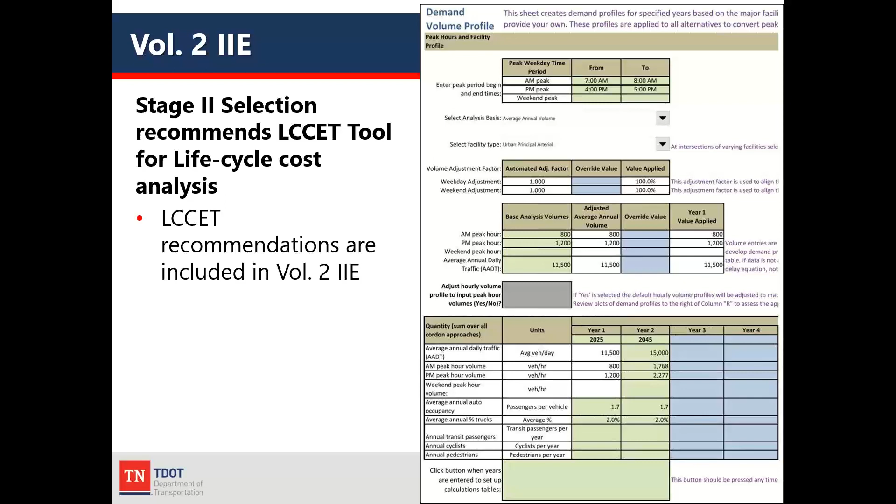But we do provide guidance on how to use it. Some of the inputs that should be standard inputs for TDOT use are provided in the manual, as well as information on where to download the tool and generally how to use it.

And then for the predictive crash analysis, we specifically wanted to keep this as simple as possible. TDOT has been using predictive crash analysis, but quite frankly IHSDM can be kind of a heavy lift, so sometimes it doesn't get used even though everyone sees the benefit of it. So we wanted a very simple tool, and SPICE fit that, and that way maybe it would get used a little more often.

SPICE is geared towards intersection controls. It can do some interchanges, but really if you get into an interchange, you probably want to just switch gears and get into an IHSDM analysis.

But SPICE, again, is a very simple tool developed by FHWA, maintained on the Crash Modification Factors Clearinghouse. We provide some guidance on how to use it for TDOT's process, and really hope that it takes hold and sees more use as far as predictive crash analysis in the process, because there's a lot of benefit to doing that.

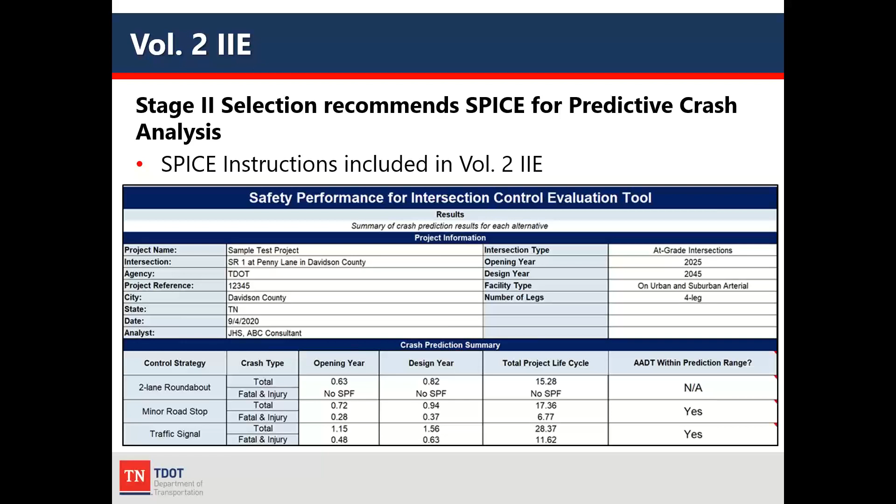Okay, so that was a summary of what all is in the intersection interchange evaluation. Before I stop, I will give just a very brief summary of Volume 3, which is design. That draft went in this morning, the second draft. It'll be posted fairly soon on the website.

But this is really the most controversial one, because this is the one where we get into updates for driveway spacing and median openings and that sort of thing. So Volume 3 does update TDOT's design criteria. It's very closely coordinated with the 2018 AASHTO Green Book to get TDOT's design guidance more in line with that, as well as some other terminology.

It implements some elements of TRB's Access Management Manual 2nd edition. Very importantly, we did a peer exchange with GDOT and VDOT and had conversations with them on what they were doing that worked for them, and what they would like to see changed in their process. It was very much on purpose - we wanted to have that peer exchange with our sister states that have similar geography and political makeup as Tennessee, so that we have a consistent approach across these states, and certainly it was tailored to Tennessee as we went through the working group and everyone worked together on that.

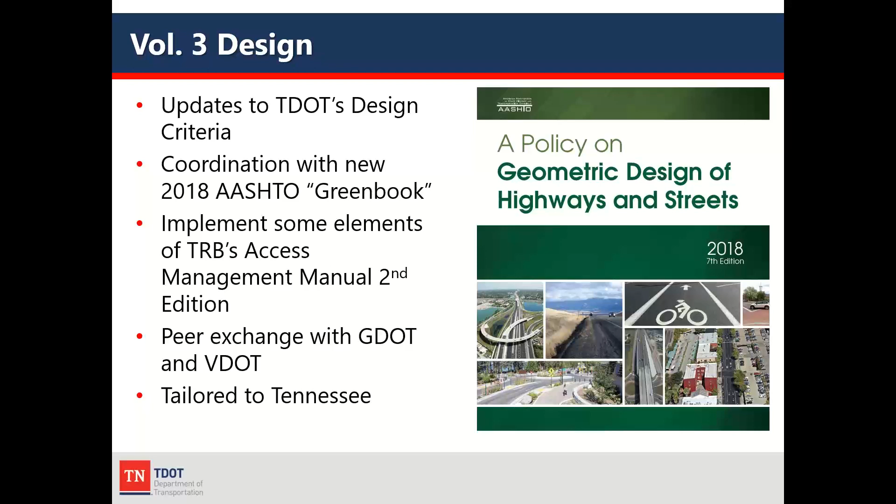One of the big things driven into us as we got started was that TDOT leadership wanted to make sure it aligned with the 2018 Green Book's context classification system. So TDOT guidance has been in agreement with the functional class of local, collector, arterial, and freeway, but we're still very much operating on just rural or urban as far as context classes in Tennessee. So this is the first design guidance for TDOT that switches over and does the rural town, suburban, urban, and urban core.

And we're excited about it. It certainly is going to be a little bit of a rocky road as it gets implemented, because this is the first manual that's doing it. So some other areas need to catch up as far as the official classification map of the routes and such. But this does get it started, and it really gives us a lot more options to help take into account pedestrians and bicyclists by having those extra context classes than just rural or urban.

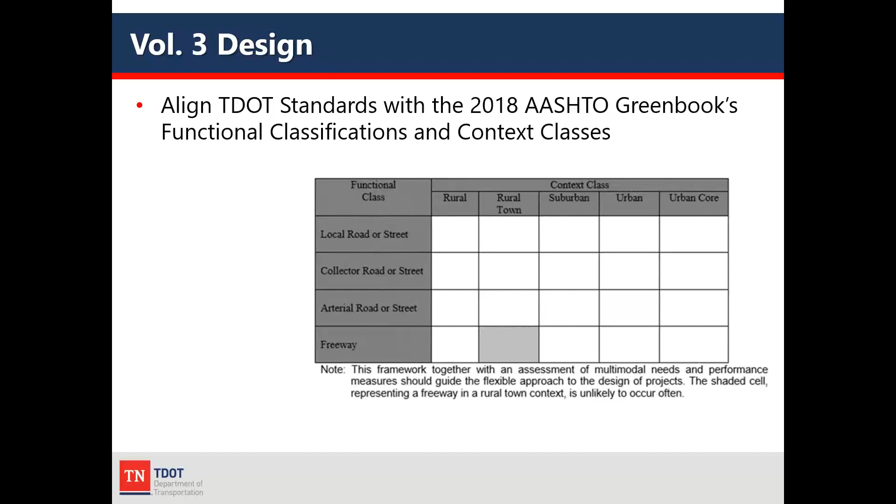So some of the main points we hit are intersection spacing, driveway spacing, median design, U-turn guidance, and turn lane warrants and length. On turn lane warrants, TDOT has been using the old Harmelink tables, which have been around since the 60s. So we're bringing them up to the newer NCHRP reports - I forget the numbers now - on updating those unsignalized turn lane warrants and lengths, that are also in the 2018 Green Book we've utilized in TDOT's guidance.

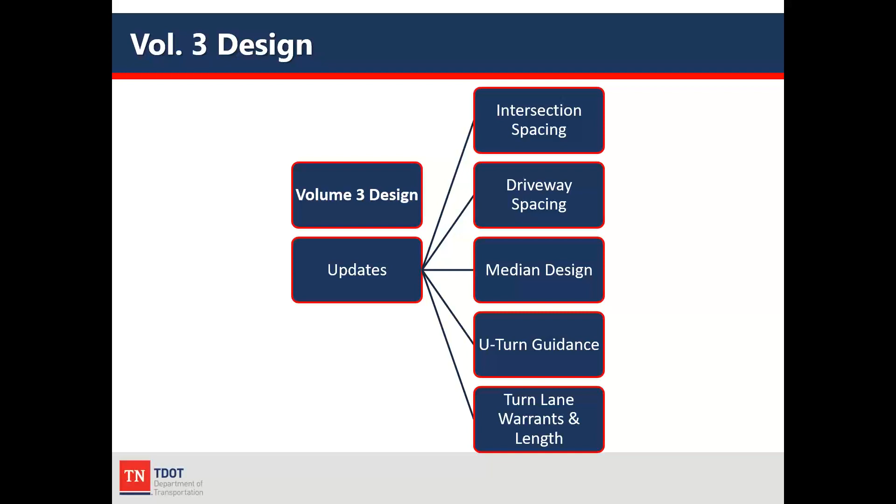There's a whole suite of options as far as intersection and driveway spacing that are considered. They have a lot to do with functional and context classes, but also whether the arterial has a restricted median.

As folks are able to get a hold of Volume 3 and take a look at it, you'll see that we allow a lot closer driveway spacing when you do have a restricted intersection. So if you're looking at right-ins, right-outs, J-turns, we're pretty comfortable with those being closely spaced like they are now. But it's the full access locations that we're really trying to get spaced out, because the safety data shows that those restricted crossings are so much safer that we can stand to have those a little closer. And if we can space out the others, then all the better.

When we got started on this manual, we found that TDOT's spacing requirements are generally about half of the other states around them. So there was some room to get a little more restrictive in the guidance without falling out of the norms of the area in the Southeast.

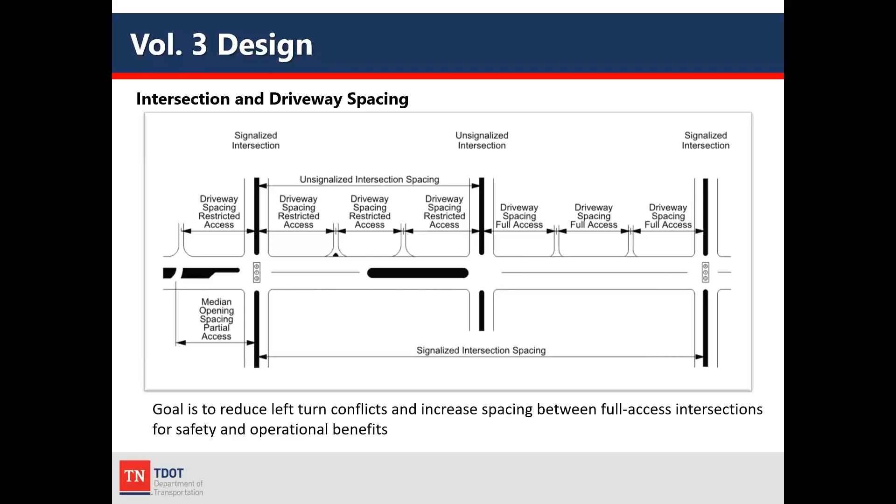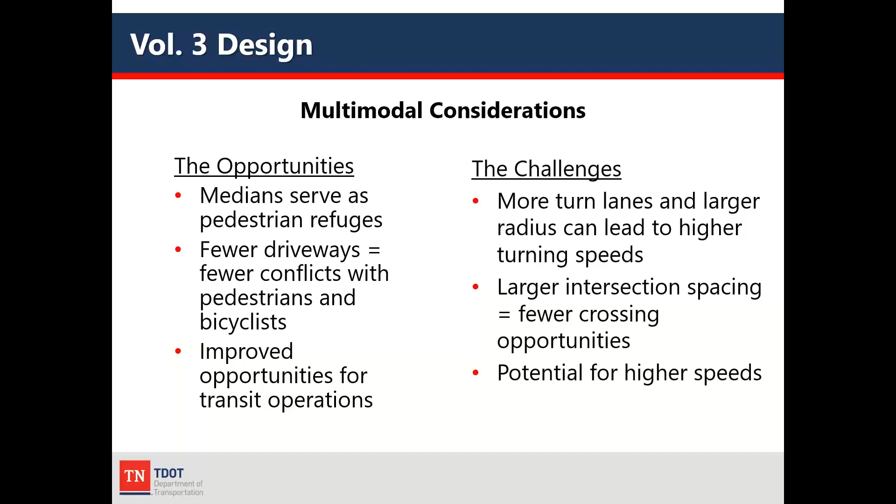All right, that was the 3 volumes of TDOT's new Highway System Access Manual. Certainly happy to answer any questions anyone might have.

And Kristina, I can't hear you if you're talking. All right, looks like Kristina may have lost her ability to speak in the mic. I don't see any questions come in. I'll kind of jump in and take over at the end. Does anyone have any questions for John?